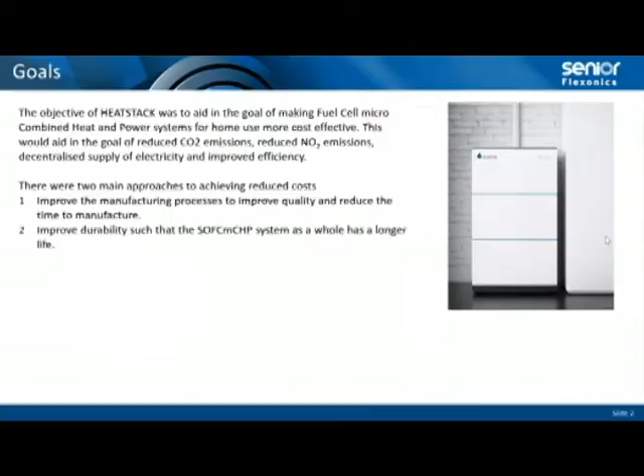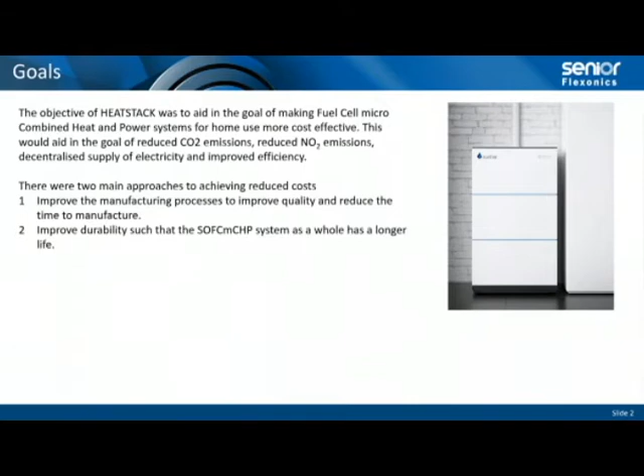So the objective of HEATSTACK was to aid in making micro CHP fuel cell systems more cost effective. This will help us to reduce CO2 emissions by introducing the fuel cell micro CHP, reduce NOx, decentralize supply of electricity, and improve efficiency. So the two main ways of doing that were to improve the manufacturing process, which would improve quality and reduce time to manufacture. Pretty obvious. And the other way was, by improving quality and processes, to improve the durability of the overall system, so system life was increased, which again is a reduction in cost.

The solid oxide fuel cell stack requires a cathode air preheater. As the name suggests, it preheats the air going into the solid oxide fuel cell stack. This significantly improves efficiency and enables the fuel cell to function at its working temperature. So before HEATSTACK started, we had been supplying Vaillant, who were the early partner in HEATSTACK before Sunfire took over all of their activities.

Can you all see my screen? Yes, I can. Good. So as I was saying, before HEATSTACK started, we were supplying Vaillant with heat exchange plates made from Inconel 625. 625 contains around 60% nickel, so it has very good high temperature strength, which is suited to the working conditions of the cathode air preheater.

Gas inlet temperature is typically around 800 degrees C, but it has two major disadvantages. The nickel, of course, is very expensive, so it makes 625 expensive. And the corrosion resistance layer on 625 is a chromium oxide, and at high temperatures the chromium oxide can evaporate, and the chromium then contaminates both the fuel cell and the waste condensate.

So working with Vaillant at the time, at the start of HEATSTACK, it was decided that we needed to change the material away from 625. We did initially try a different AluChrom with a higher percentage of aluminium, but that was almost impossible to work with. So we went for AluChrom 318, which has 3.5% aluminium, just above the minimum amount needed to ensure the surface regenerates, and very low nickel content.

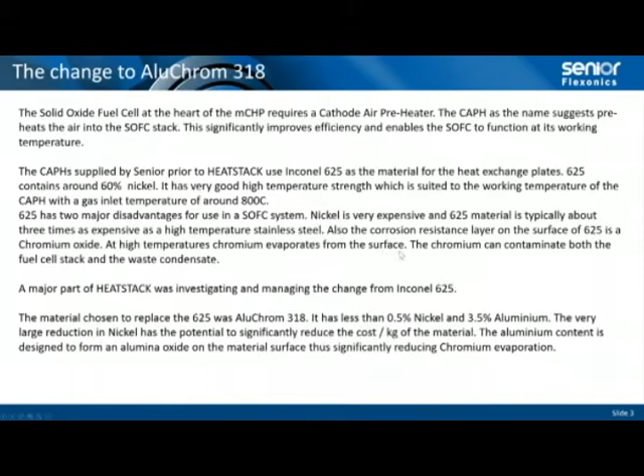So with this large reduction in nickel content, we have the potential for significant cost reduction, and because we have an alumina surface on the material, not a chromium oxide, the chromium evaporation is much reduced, and Kun will talk about this activity that the University of Birmingham did.

So the plates are 0.3 millimeters thick, and because of its construction, we actually allow the whole system to move and distort as it wishes. Both Vaillant and Sunfire have shown that the distortion has minimal effect on the life of the component, or the performance of the component, I should say.

So, as I said on sheet 3, the low percentage of nickel in the AluChrome 318 has the potential to significantly reduce the cost of the cathode air preheater. The difficulty in the immediate term is that 318 is a new material and hasn't got a significant market. Until we can start to develop the market, both with our own products and with VDM selling 318 to more customers, we're not really going to see the advantages of the cost reduction.

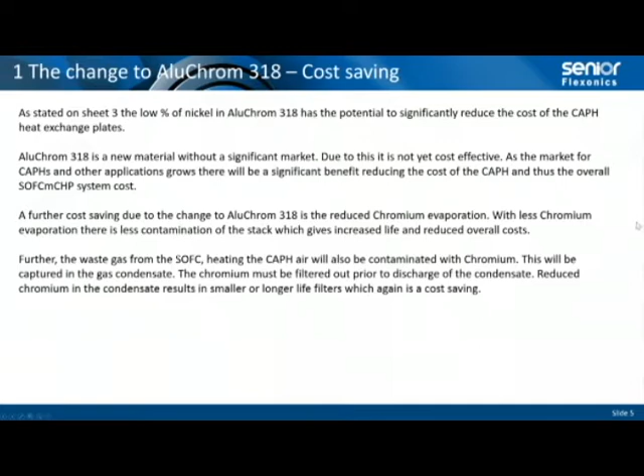So part of HEATSTACK is actually to try and highlight the advantages of AluChrome 318, so that even our competitors come in and use it, because then it will help the whole industry to reduce costs. So we wanted to help VDM to market their material. A further cost saving with the 318 is reduced chromium evaporation, which gives less contamination of the stack, increased life, and reduced overall cost. And because we're not contaminating the exhaust gas, which forms condensate when further cooled, it allows Sunfire to reduce the size of the filters or have longer life filters. So it's a significant advantage with the use of AluChrome.

As we discussed, Inconel has very good properties. It has elongation of 51%, which means it can be easily formed. AluChrome 318 has only 22%, which means that it cannot be formed into such deep or rapid cross-sectional changes.

So we needed to do quite a lot of work to get a design which both met performance and was formable. I'll show you images of some of the problems we ran into on the next sheet. But working with HEATSTACK at this stage, we were able to achieve a cathode air preheater with the same performance as the 625 formed cathode air preheater, but with a very much changed profile.

The other problem we found with AluChrome almost straight away was with the 625, we could nickel braze it, which meant that when we were laser welding, if we had a small leak, we could put a dab of nickel braze over the leak, vacuum braze it and repair it. We tried many different things for brazing the AluChrome, all were unsuccessful. So that meant we had to very much improve the quality of our laser welding.

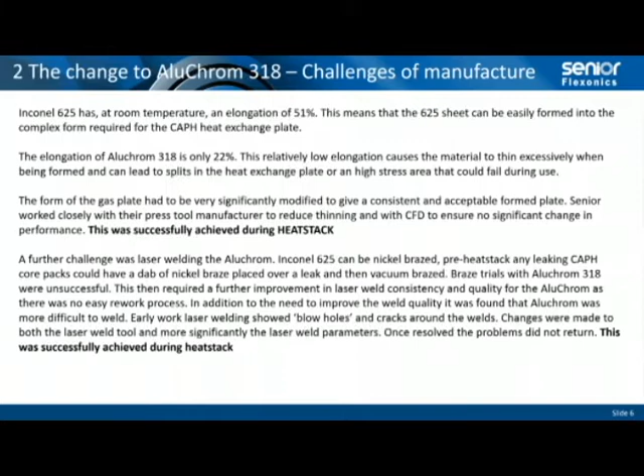And that's where HEATSTACK came in, because it allowed us to manufacture new tools, try new things, and develop our welding parameters. So that was again successfully achieved.

So you can see on these images here, when we were first forming the AluChrom, we were getting splits in many places. What we had to do was increase radii, reduce material elongation, so that would reduce the thinning and stop the splitting. So we had a few iterations to get this correct.

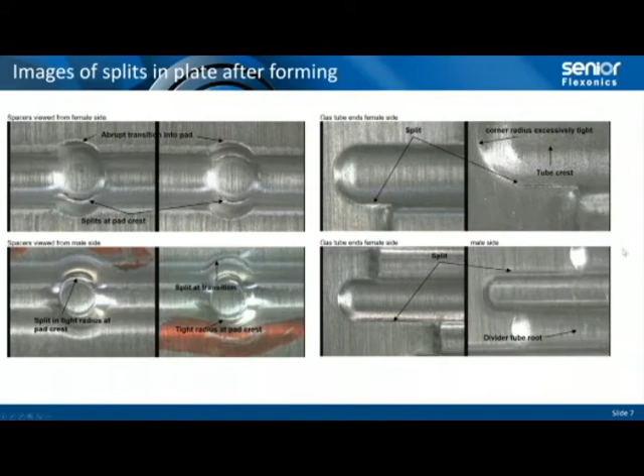And of course, you can't only think about the forming, you have to make sure that the performance is maintained as well. But since we've done our trials, we haven't had any problems with splitting plates.

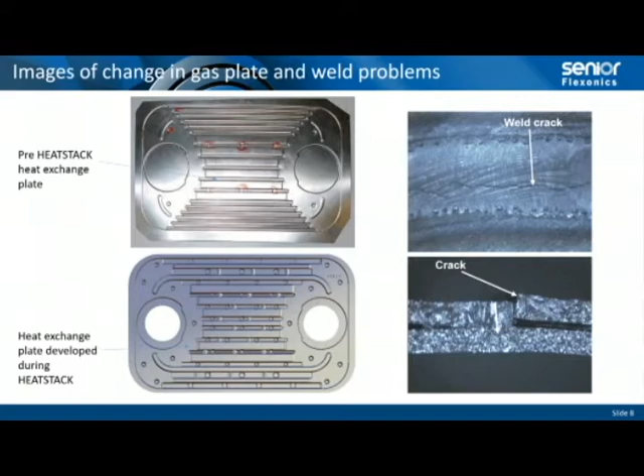We also picked up cracking in the weld on the AluChrom initially, so you can see here we're actually cracking in the middle of the weld and sometimes cracking right through the weld. Again, that's all down to tooling and parameters to alleviate that problem. But once we developed that, we had no concerns with that, and had a very high, I think it's 97% right first time when we were laser welding these together.

So if I pass you to Kun for this sheet. Okay, hi guys, my name is Kun Zhang, and as Charlie said, I'm a PhD student from University of Birmingham. I'm responsible for work package 4 of the HEATSTACK project, which is material testing and analysis.

During the early stage of the HEATSTACK project, the main task of work package 4 is to evaluate the chromium evaporation of 4 different high temperature alloys used for the cathode air heater. The alloys we tested are Inconel 625, stainless steel 309, aluminized 309, and AluChrom 318. After the experimental evaluation, we selected the best material with the lowest chromium evaporation for developing the cathode air heater.

The chromium evaporation test of these alloys was conducted by the denuder technique, which was created by Chalmers University in Sweden.

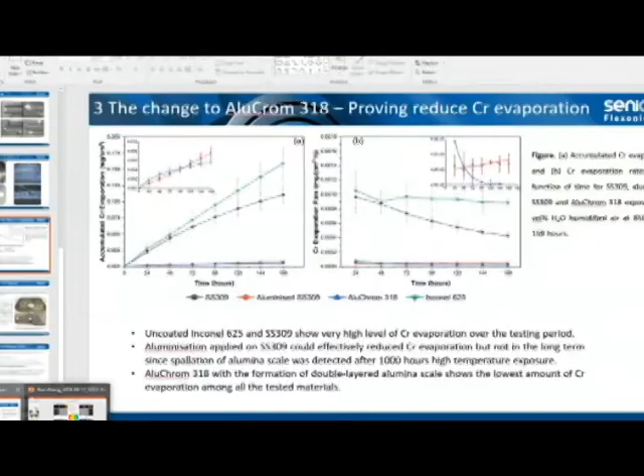Okay, yeah, no problem. So in figure A, we can see accumulated chromium evaporation of the 4 different alloys tested for 168 hours. Figure B is the chromium evaporation rate of the 4 different alloys.

As we can see, Inconel 625 has the highest amount of chromium evaporation because Inconel 625 produces pure chromium oxide as a protective layer during high temperature exposure. For 309, when stainless steel 309 is exposed to a high temperature environment, it produces a chromium manganese spinel layer on the surface, which has lower chromium evaporation compared to Inconel 625.

Aluminized 309 and AluChrom 318 have the lowest amount of chromium evaporation because of the formation of an alumina layer on both steel surfaces. However, if we look into figure B, we can see the chromium evaporation rate of aluminized 309 increased with time, because during high temperature exposure, the alumina scale formed on the aluminized 309 surface suffered very bad scale spallation, which exposed chromium oxide to the high temperature environment, leading to high chromium evaporation.

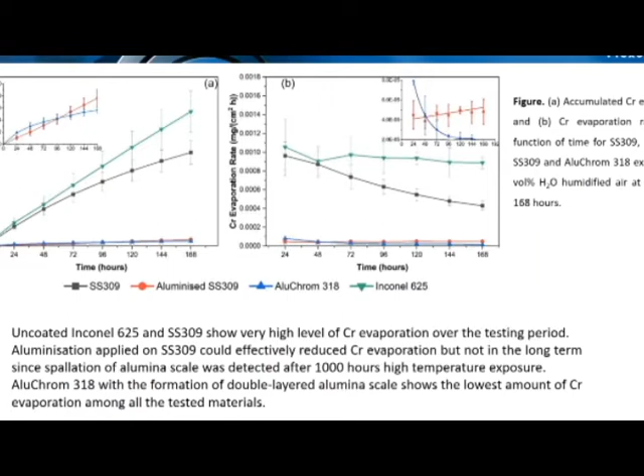However, for AluChrom, the chromium evaporation rate decreased with time, which means that the alumina scale formed on its surface had no scale spallation and could also reduce chromium evaporation effectively. So based on the experimental results from this technique, AluChrom meets the material requirement for developing the cathode air heater for the HEATSTACK project.

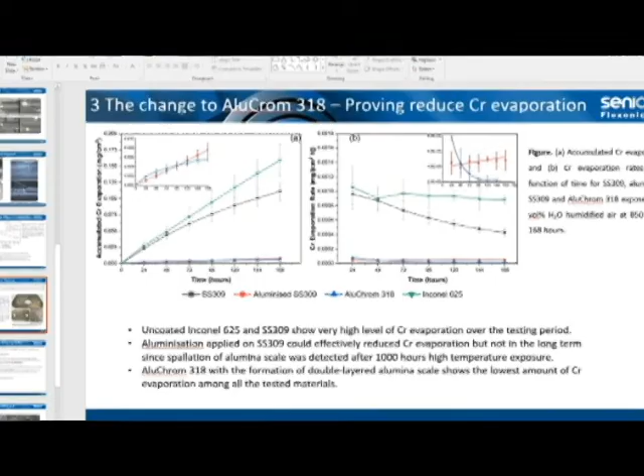However, after we tested the AluChrom heat exchanger in SOFC conditions, we also found some other issues. Since the exhaust gas from the fuel cell stack and the fresh air go into the cathode air heater in opposite directions, the hot zone and the cold zone will have different oxidation status. Here I have a figure to show you guys.

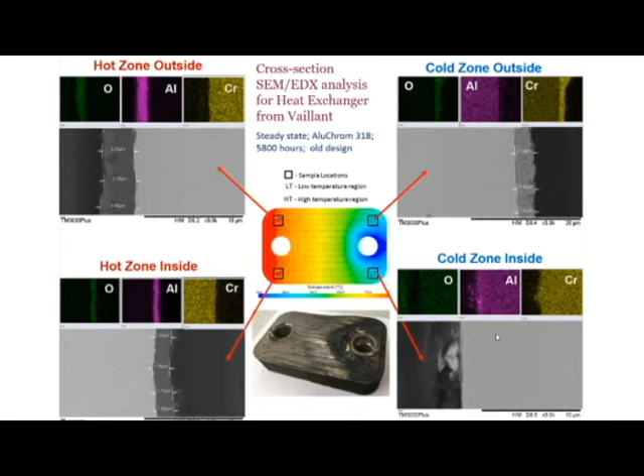So in order to optimize the material, we came up with one idea, which is the pretreatment. The pretreatment allows sufficient formation of alumina scale on the heat exchanger surface before we put it into real application. The pretreatment was conducted at different temperatures from 800 to 1100 degrees, with different pretreat times from 1 to 4 hours.

Different temperatures will cause the formation of alumina with different phases. At 800 degrees, it will form metastable alumina like gamma alumina. At 1100 degrees, it will form alpha alumina on the steel surface. Compared to the metastable alumina, alpha alumina has the best chromium retention ability.

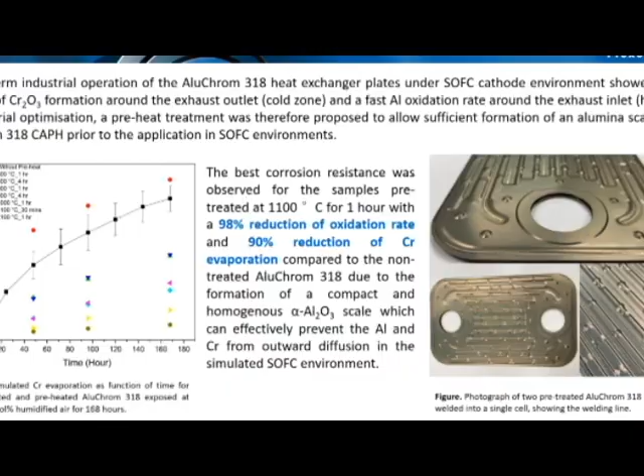So just to finish off what Kun was saying, Kun proved that he could form an alpha alumina layer at 1100 degrees C in an hour, and that was done on a single plate. So then the concern for Senior was, with that alumina layer, would it cause us problems with our laser welding?

So then we did trials of laser welding the plates together to see what the effects were, and the results were very positive. As we go forward, we'll be investigating with Sunfire on developing a pre-heat treated plate, such that chromium evaporation is minimized straight from the off, and across the whole plate, not just the hot end. That was a very useful outcome which we weren't expecting at the start of the project, to show that a preheat treatment was very useful.

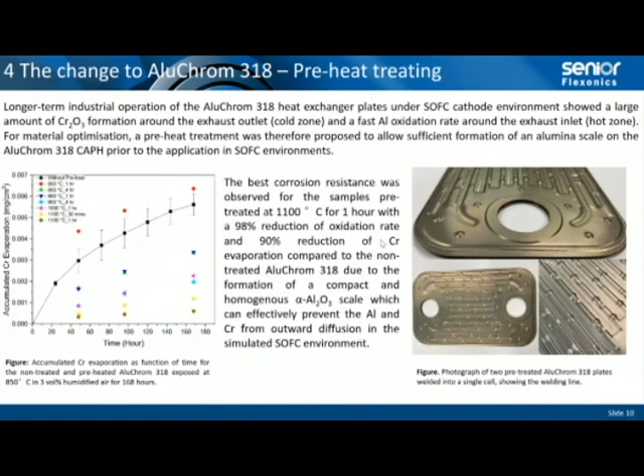In terms of improvements in the manufacturing process, when we started the HEATSTACK project using prototype processes, it took us on average 8.8 hours to build one unit. HEATSTACK allowed us to buy capital and tooling to develop our production processes, and through HEATSTACK we've now reduced the time to produce a unit to 2.8 hours.

We've then transferred all the capital and tooling to our manufacturing site in the Czech Republic, all ready for low volume production. Once the production engineers in Senior Czech start working with the system, they will further improve the processes and reduce cycle times, so we will see a good increase in productivity from that.

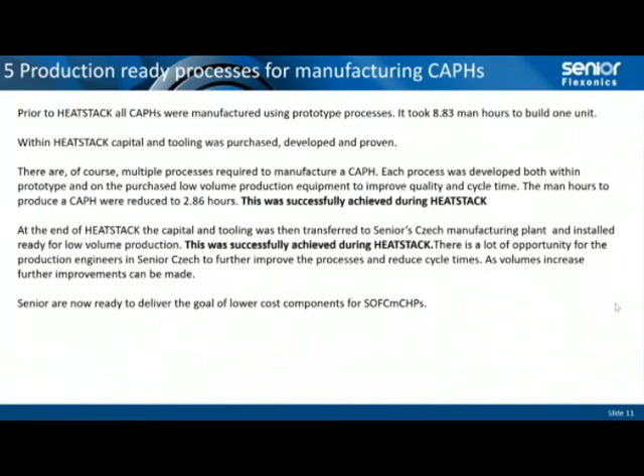So Senior is now ready to deliver on our goal of low cost components for the solid oxide fuel cell micro CHP. HEATSTACK has delivered what it set out to do, and received very good funding from the EU for all the partners concerned. So we've been very pleased with the process.

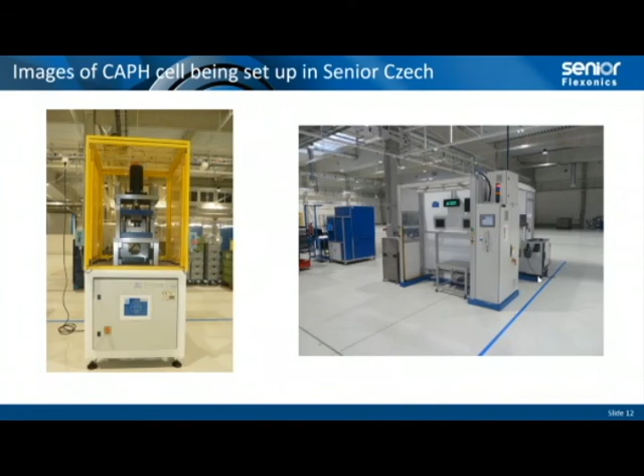So if I look now, this is our Czech Republic facility. They've just recently built an extension on their factory. This is the laser welder here, and they're just bringing the rest of the machinery in, and it'll all sit within this blue area and be the production cell.

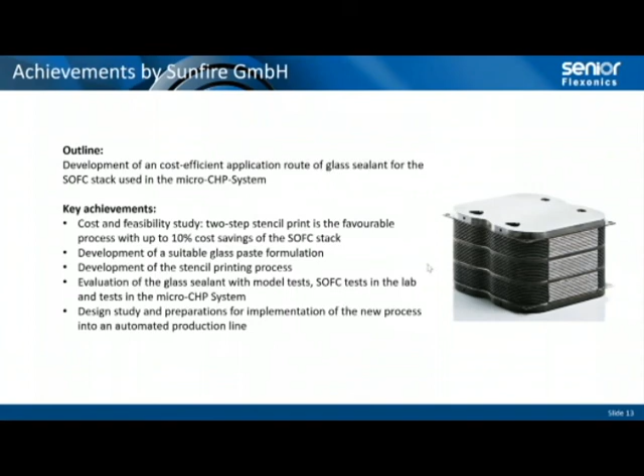So that's the end of the presentation. Kun and I will be more than happy to answer any questions that you guys would like to ask us.